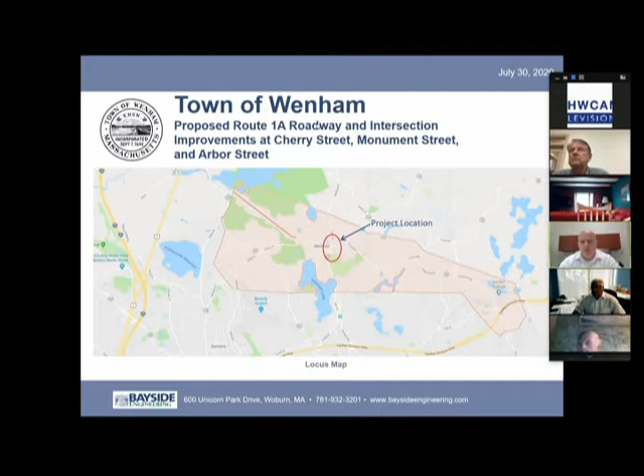So what I'm going to do is introduce Bruno Campia from Bayside Engineering. Bruno, you can feel free to introduce anybody from your team that is on the call. So Bruno?

All right, I'll begin. Actually, Norm Brown is supposed to be joining the meeting, and we'll also have, at some point, Mark Odorano. Mark's on, Bruno - Mark is here. Oh, he is, okay, I guess I just can't see him. Mark is a registered professional engineer and will be the project design engineer for this. Mark, can you unmute yourself? Is Norm on there? I am, Bruno, if you can hear me. Okay, there you are, now I see you also.

Just beginning - as I said, my name is Bruno Campia. I'm glad to be here again. I was here last in November, at which time Norm and I were here, and we introduced the downtown Route 1A roadway intersection improvement project and its scope, which involves the three intersections of Cherry Street, Monument Street, and Arbor Street.

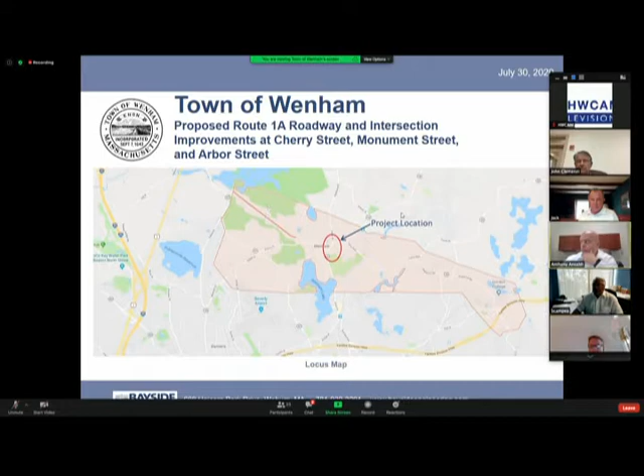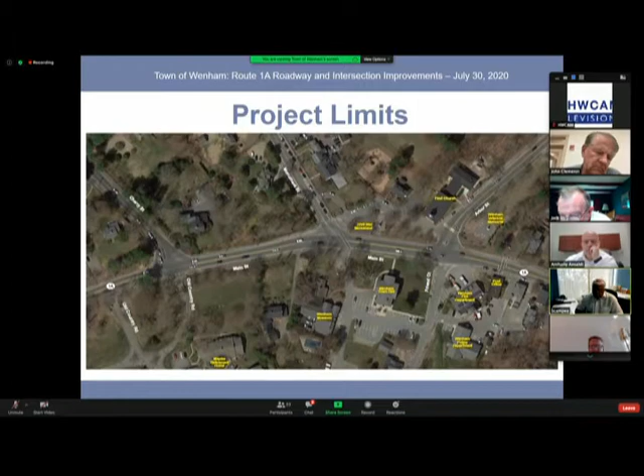Back in November, could we go to the next slide? Sure. Back in November, the PowerPoint presentation was made based on a traffic study completed by the Boston Region Metropolitan Planning Organization, the MPO. That study collected and analyzed traffic data in this area to determine the optimum combination of traffic controls for the downtown corridor and the intersection. The MPO studied several alternatives and analyzed and evaluated them in order to come up with the optimum solution. The MPO recommended a scheme called alternate 4A, which was accepted by the town as the selected alternative, and also supported by MassDOT as the preferred alternative.

That alternative, which you see in front of you, begins approximately 400 feet south of Cherry Street and goes northerly to approximately 300 feet north of Arbor Street, and it includes all three intersections. The total distance from the southerly limit to the northerly limit is approximately 1,400 feet along Route 1A. The alternative improvements include signalization of Cherry Street and signalization at Arbor Street, and the two traffic signals would be coordinated to achieve more efficient traffic flow. The intersection of Monument will remain under stop sign control; however, it will have geometric revisions and improvements.

Other improvements will include minor widening along Route 1A so that we can gain some additional width. There will be a bike lane on both sides of Route 1A in both directions, northbound and southbound, and there will be a sidewalk also along Route 1A along the full length of the project. Sidewalk on just one side? No, on both sides - both sides, okay, yes, thank you. That was indicated by the red. Just - oh yes, okay, I see it. You will see it better once we get to the actual construction documents; it'll show up a lot clearer. This was just the concept plan that was included with the traffic study.

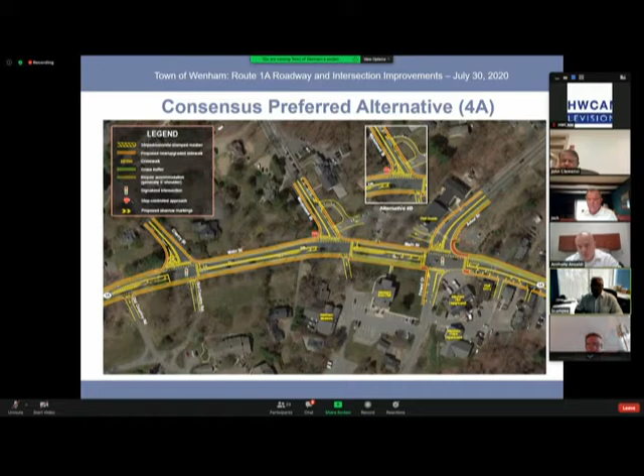So back in November, Bayside had completed a survey of all of the project limits, which is part of the set. You would have to jump forward, Anthony, in order to see that - all of our survey base plans. Well, this is the color. If you keep going several slides forward, I believe.

Yes, this was the survey, just the base plans, which is the starting point. We have to get this so that we can actually show the proposed improvements, which we have begun to do.

So we're here this evening to update you and provide an early look at the progress that is being made. If you could go to the colored plans now, Anthony.

Right there, first one. Go to the Cherry Street intersection, which is the 3rd slide. Yes, this one. This is the intersection of Cherry Street, and this is a 20 scale plan, which was the base plan. We laid out in design. It hasn't been completely finalized yet because we're in an early stage, but this is how the proposed design on the concept plan is laying out on the proposed scale plan.

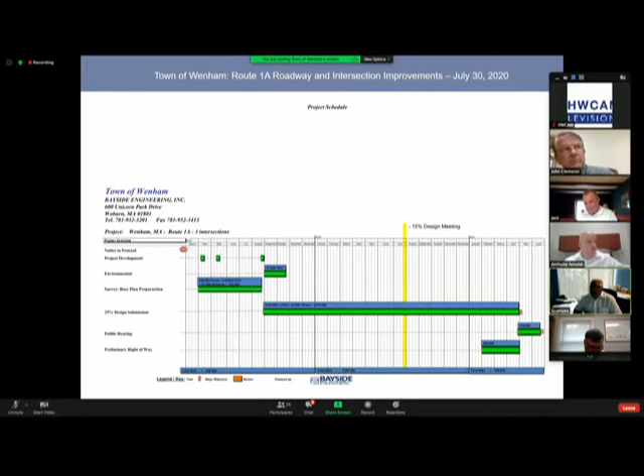John Clemency: At one of the previous meetings, you discussed making a sort of mock finish of the road, so that we would know what it would mechanically work like without actually making the road changes. Is that still in your plans?

Do we lose them? Bruno, yeah? I'm sorry? Was John- that addressed to me? Oh, yes. Oh, I thought, I didn't understand that was addressed to me. Okay, I'm sorry, I should have said your name. I'm sorry, Bruno, yeah, you were going to do a mock surfacing.

In other words, like a quarter inch resurfacing with color, painted lines and so forth, to imitate what the road would work like when it was completed.

I'm sorry, I don't remember saying that. I guess if you wanted to see where the road width would lay out, we could probably just go out there with a tape measure and put a couple of stakes down as to where they might be. I don't think that would be a problem, would it, Norm?

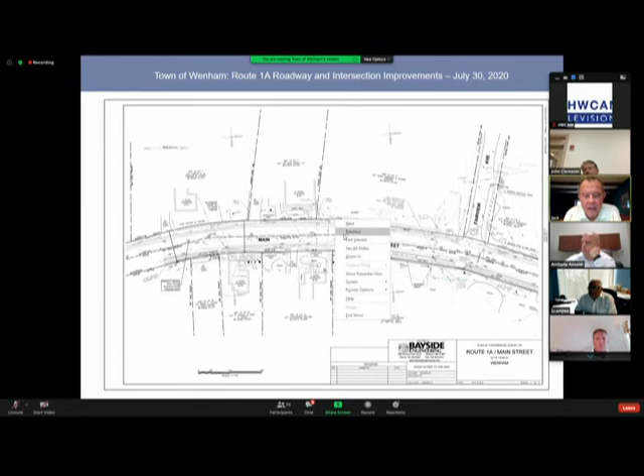So I was watching here - so let's take the first one, which is taking a left on Monument Street, coming as you enter 1A, so that's a dangerous left. So how are we going to alleviate that?

Is there going to be a light there, or what? Taking the left there, you're taking your life in your hands. At which intersection? The Monument intersection - coming from entering 1A from Monument, trying to take a left onto Main Street from Monument. That's a very dangerous intersection.

Well, I just think it is. I do it all the time. Cars come from both directions, and it's tough. So I'm not suggesting you need a light, I just wonder, is there anything in your plans that makes it safer to take a left on Monument? That's my question.

I think two things help from the current situation. Number one, right now because there's so much pavement, a vehicle entering has a lot of directions to look from. The vehicles can be approaching you from some unexpected direction.

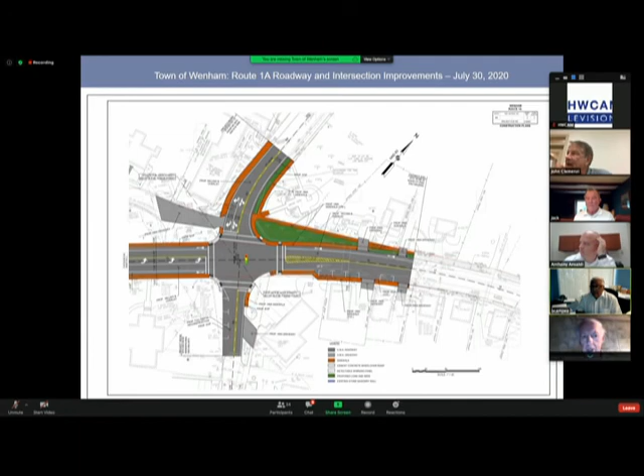My comment there was, I'm sure we have not looked at that in detail. There will certainly be some utility poles we'll have to relocate, and the utility work is very significant. We're going to have a site meeting with the utility companies and agree where all these poles will go once removed and reset. But Mass DOT will not pay for burying utilities. I think that's probably one of the public's concerns - if there's an opportunity here to bury the lines between the Monument and Arbor, so that since we're already impacting the Civil War fence, we can at least get the poles and lines out of the way there. Just a side comment.

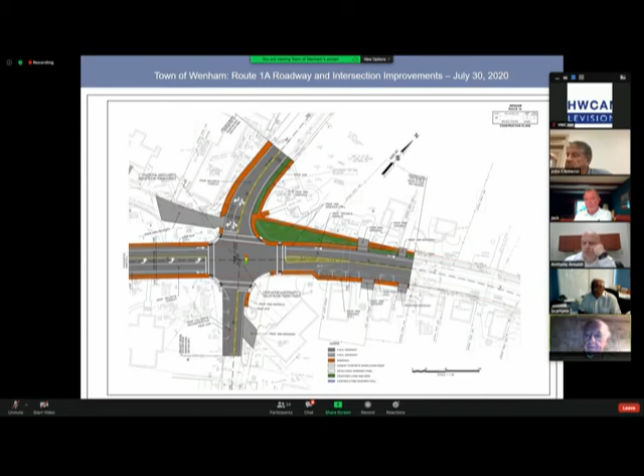That's all I got, Jack. Thank you, Gary. Any more comments by the selectmen? Anthony, are we done? I'm all set. That's it, Jack. I just want to thank Bruno, Norm, and the team - they're great to work with and a pleasure, and I look forward to working with them as we progress.